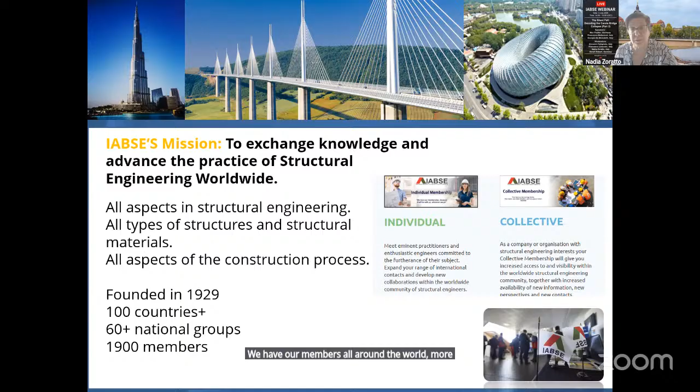If you are not yet a member of IABSE, you can become part of this great organization as an individual or collective member. We have members all around the world, in more than 100 countries, and for this reason we have several national groups that are very active in organizing webinars and conferences. In Italy, we have also a national group, IABSE IT. It was refounded recently in 2022, and we are trying to promote several activities related to technical task groups, dissemination activities, and training activities.

Upcoming conferences: we will have the next IABSE Congress in Incheon, Korea. I'd remind you that the early bird registration has been extended up to the 19th of July. Looking at next year, we will have the IABSE Spring Symposium in Guwahati. And then we are proud to announce that the next IABSE Congress will be held in Italy, hosted by Politecnico di Milano. The call for abstracts is already open, and the deadline is mid-September. So I invite you to send your abstract, as we have a lot of general and special sessions, so I'm sure you can find a proper topic for your abstract.

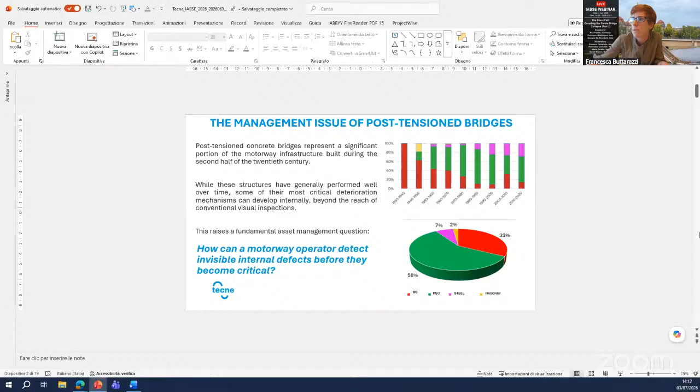This raises a fundamental asset management question: how can a motorway operator detect invisible internal defects before they become critical? And if you see the distribution of our bridges... can you see the charts? No, you don't see the charts. Wait a minute, I will... sorry... perhaps now, okay, yes, okay let's do like that. So the question was, how can a motorway operator detect invisible internal defects before they become critical? And if you see the distribution of our bridges, you can understand this is a very critical question for us, and we have to respond in an organized way.

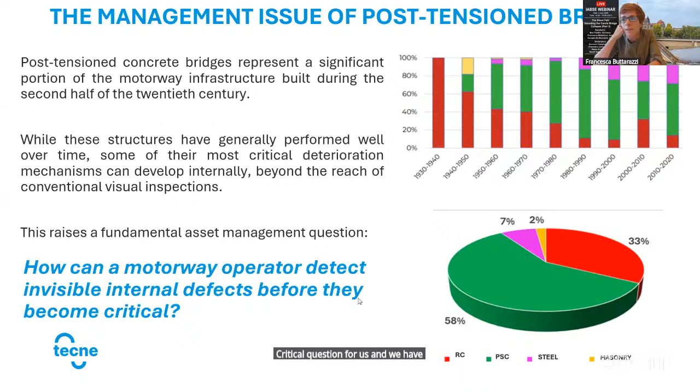To understand the problem it's also important to understand its scale. Here are some numbers about the Autostrade per l'Italia network: we have more than 2,000 bridges with a length over 10 meters, and 1,840 overpasses. The size and diversity of the network mean that special inspections cannot be planned as isolated actions. So we have to answer many questions: which structures first, which girder, which cable, which samples, which techniques.

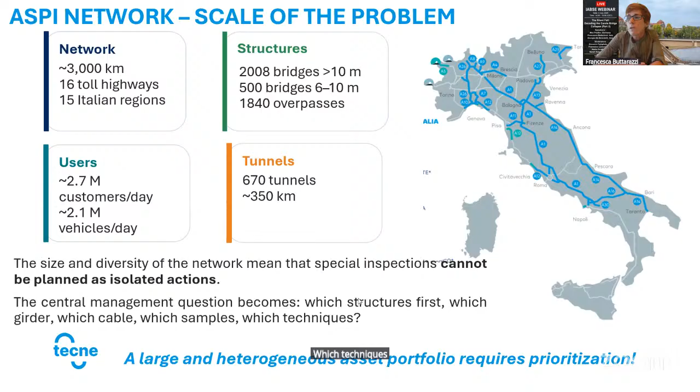This is why the answer has been an organized process that, starting from visual inspection, transforms the data collected during visual inspections into engineering decisions and a management strategy. To do this, we follow a chain of actions: prioritization, definition of sampling, diagnostics, and then we can define the proper strategy to manage the structure.

As you see, all this step is in some way defined by some guidelines. We are working on that, even with the regulatory, with our Ministry of Transports, as well as some consortium of universities. You see here the Fabre Protocol, but first of all, the bridges guidelines that were issued by the ministry.

In order to adopt a multi-level, multi-risk framework for bridge asset management. But then the single manager also needs to do some internal documents, such as one for prioritization, or also for technical regulations, in order to provide technical operational guidance on the various phases. It's not always the same laboratory on the field, it's not the same engineer that does the inspection, so it's important that activities follow the same regulations, in order to have results that are comparable.

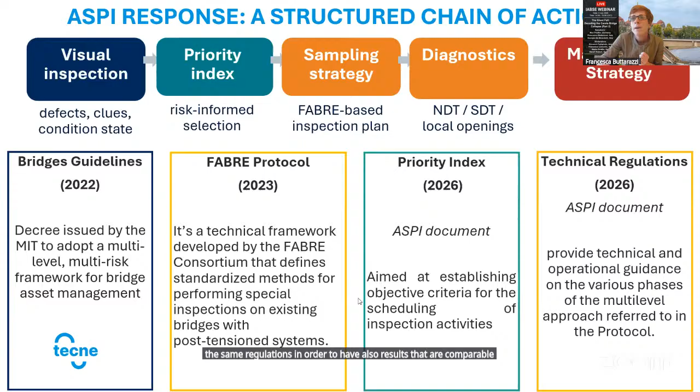The general framework - I want to give you a brief note on the Italian bridge framework, the Italian bridge guidelines that introduced this general framework to manage existing bridges. This flowchart has been translated - of course it's in Italian, but you have the reference of an article in which you can find all the description of this flowchart. You see that the objective of this flowchart is to have an organized sequence of activities.

The objective is to define the interventions, the bridges in which you have to do interventions, but at the same time, with all these activities that start from the census to the inspection and then to the classification of risk and the preliminary and accurate assessment, the objective is to reduce the risk of the network, as well as giving priority to the managers to assess all the bridges of their portfolio.

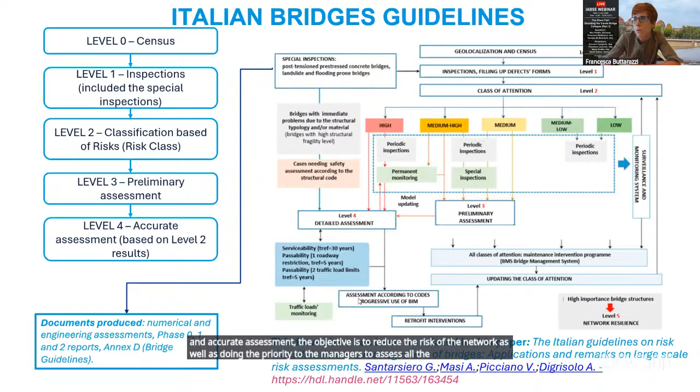So now we will go through the process I have shown you before, starting from visual inspections, which are in any case the first step you have to do, because we have to look for warning signs. And these warning signs can be visible defects as well as warning defects.

In Italy, there is even the bridge guidelines or the FABRE document that have introduced this differentiation between defects that are evident - you see cracks, you see the reduction of pre-stressing reinforcement, you know that there is something that is not going well on that structure.

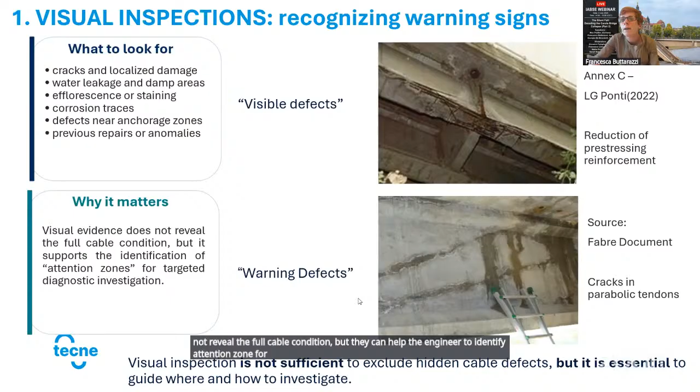But there are also warning defects. These are defects that do not reveal the full cable condition, but they can help the engineer identify attention zones for the following investigation.

After we have done the inspection, we have all the data to do the prioritization. Of course, we also use the data collected in the level 0 phase, so in the census. Here we have defined, in accordance with the Federal Highway Guidelines, a priority index that is a combination of the probability indicator of damage and the collapse consequence indicator.

So as well as for risk analysis, we have something connected with exposure and something connected with vulnerability. Here we have used the weights that are defined in the Federal Highway Guidelines. In some cases, we have done some adjustment for the Italian situation and also for the ASPI management needs.

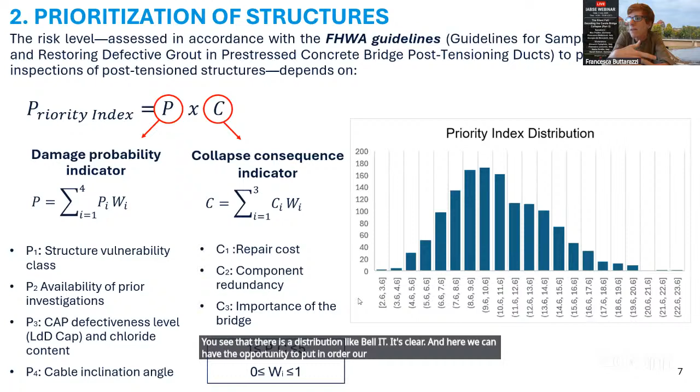And as you can see in the distribution, the indicator runs from 1 to 25, but you see that there is a distribution like a bell. I think it's clear - here we have the opportunity to put our structures in order and to decide which ones we address first.

After the selection of the bridges, we have another question: what do we have to investigate? Here we are following a statistical-based approach, first introduced by the Federal Highway document, as I have already mentioned.

In this case, we have to make some assumptions, because we have to define the acceptable percentage of cables with defects. This is something we assess at the beginning, and then we can decide after the first phase of inspections if we have to change our hypothesis. In any case, we start generally with 20% acceptable cables with defects, and then we define the total number of cables as a function of the number of beams and the cable number.

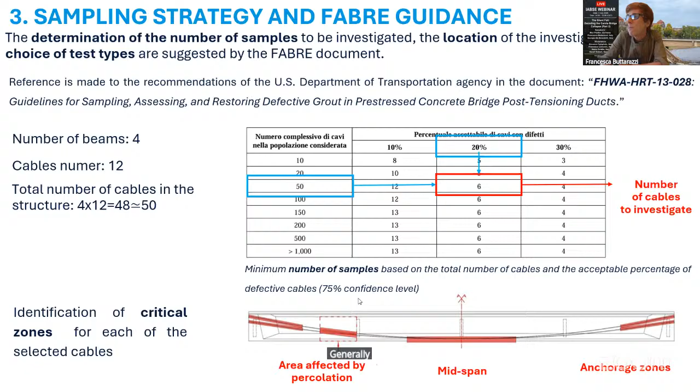And for every cable, you see also the critical zones in which we have to do the inspection - the mid-span, the area affected by percolation, but also the anchorage zones, which are generally the ones more affected by defects.

What we do now, after we have chosen the structure and decided the sampling and where to do the inspections, is follow an organized sequence of actions. The first is localization with georadar and geometric reconstruction of the PT system, in order to localize ducts and cables layout before intrusive actions.

Then we have the phase of defect screening. I'll show you some results later. We do this with ultrasonic tomography, which is useful because we can identify potential voids or anomalous zones without destroying the beam.

Then we have the confirmation phase. In some cases, generally every time, we do endoscopy, local openings, and micro demolitions, in order to go deeper into the defects and also to measure the corrosion, the lack of grout, and the grout condition.

So our idea here is that no single technique solves the problem. Reliability comes from sequencing techniques and interpreting the results together. It's important to follow this sequence of actions in order to have the possibility to give the right answer.

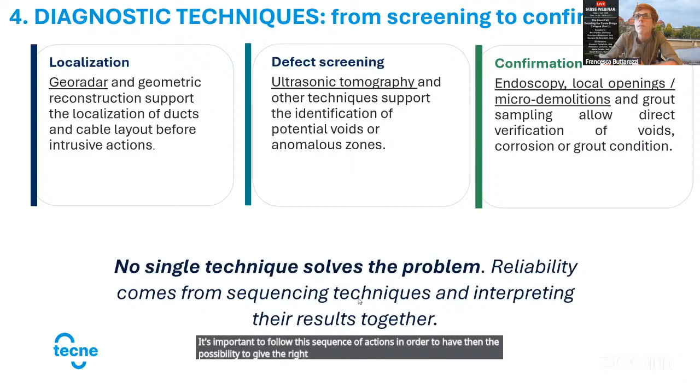Now I want to briefly touch on the different techniques. I know these are well-known, but I think it's interesting to show our results from our in-field activities. For example, the GPR technology is used to determine construction details.

It's very important to set the frequency according to the depth of the object of investigation. Sometimes it's also important to do destructive tests to supplement the data acquisition. And georadar is important because sometimes we don't have correspondence between the as-built drawings of the bridge and what we find in the field.

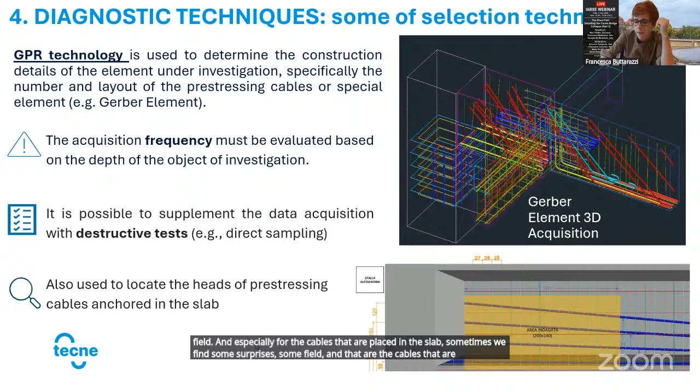Especially for cables placed in the slab, sometimes we find surprises in the field, and those cables are frequently affected by defects. Tomography testing is also, as I said, a technique we always use in order to identify potentially anomalous zones.

These results can be interpreted in relative terms, and attention areas must be subjected to direct testing. Our experience is that generally in 50% of the anomalous zones, we then find also a defect. So there are some false positives that have to be checked with direct inspection.

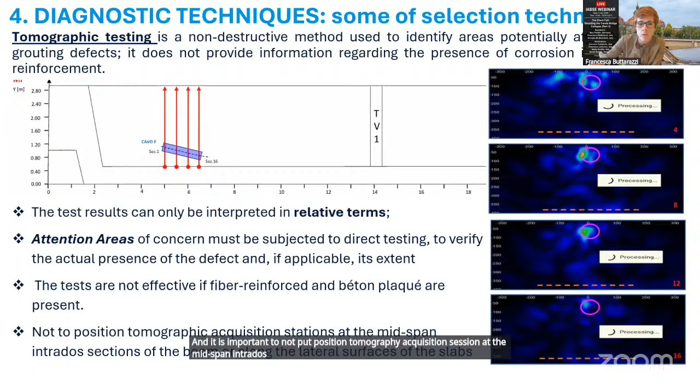Just to mention, the tests are not effective if fiber reinforced concrete and beton plaqué are present. And it's important not to position tomography acquisition stations at the midspan intrados of the beam or along the lateral surfaces of the slabs.

This is the technique I like the most, because here you can see and you can measure, but in this case we also have a different approach. We start with endoscopy inspection, a very local inspection that must be performed carefully to avoid damaging the cable. Then if we find defects, we go with local opening, wide enough to expose at least a semi-diameter of the cable.

There you also have the possibility to measure, for example as you can see in this picture, the reduction of the diameter. In this case you have all the information you need for the following evaluation of the structure.

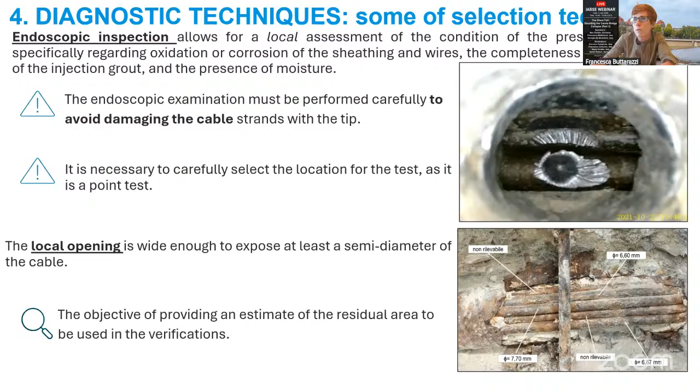In some cases we have also experimented with digital X-ray radiography, used to obtain high-resolution images of post-tension cables. In these years, low-power instruments have been developed that are compliant with the provisions of the legislative decree.

As you can see here, it's very interesting because with this digital X-ray you can really see the cable, the absence of grout, and in case of defects you see the defects. For example, in this case, grouting defects you can see here.

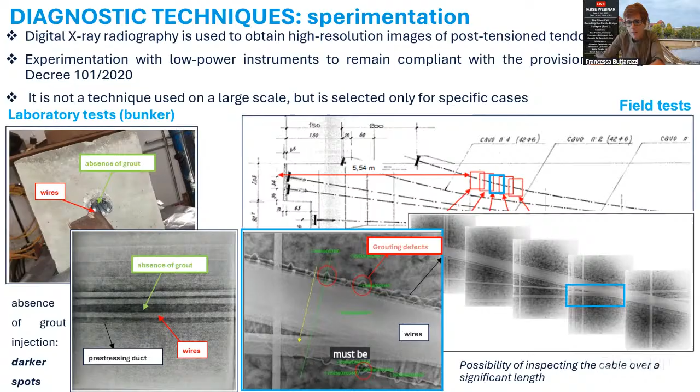These are some pictures that show the potential of this technique. What I want to say is this technique cannot be used on a large scale, but must be selected for specific cases. And with this, we move on to another topic.

Sometimes it's not sufficient to do local testing, but we have to do a global understanding of the structure. In this case, we use load testing or dynamic testing. We are aware of the difficulties of using this testing to identify defects or crack patterns, because they are not tests designed for that. But for sure, they can be used to assess the global stiffness and integrity of the structure.

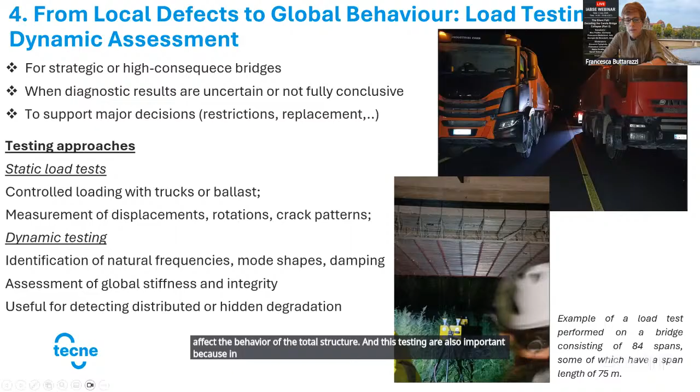And these testing are also important because in some situations we have to follow up after the single inspection. We also have the possibility to install some monitoring in order to follow the structure over time, especially if we have deformation to monitor, crack displacement, something connected with environmental parameters. And for example, also the acoustic emission strategy or techniques, which is the topic of the next presentation, can be installed and used for monitoring activity on the structure.

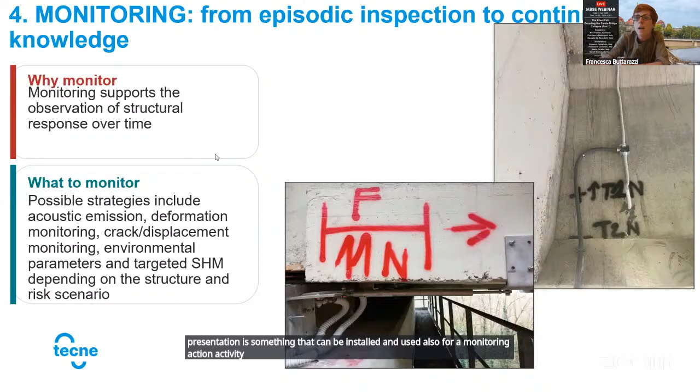Before wrapping up and going to the conclusion, I want to show you a case study of the ASPI network. This is a very long bridge, more than 1 kilometer long, representing 0.4% of the structures of the ASPI network. So it's a particular structure, and here we have a lot of beams and also many cables, of course.

We have followed the whole process to investigate this bridge, starting from a historic analysis of all the data collected in the past. It's important to say it's not only this year we are doing these techniques, but now we have an organized approach that wasn't available before the issue of the bridge guidelines in Italy. We started with visual inspection, detecting 86 warning defects and 3 visible defects. Then we moved to the strategy of sampling, defining the critical spans and cables to be selected and investigated, and then the diagnostics.

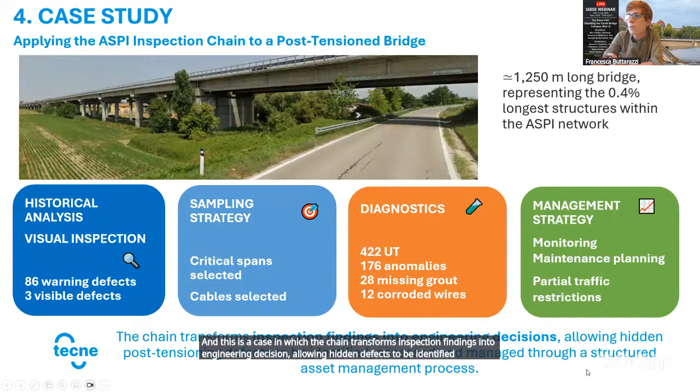And so now we are at the strategy moment, defining our monitoring and maintenance planning. Of course, we have also made some partial traffic restrictions, because we performed the assessment with level 4 evaluation of the structure, defining its reliability. This is a case in which the chain transforms inspection findings into engineering decisions, allowing hidden defects to be identified, assessed, and managed through a structured asset management process.

Before going to the conclusion, I want to highlight the importance of archiving all the data we are collecting. We have an Annex D, required by the bridge guidelines, which is a report we have to produce with all the data we collect. But ASPI, Autostrade per l'Italia, is also working on a digital archive in the Argo platform, in order to connect all the information to the beam elements of the structure. So you can check before going on site if investigations have already been done, and if you need to do some assessment, you have all the data collected.

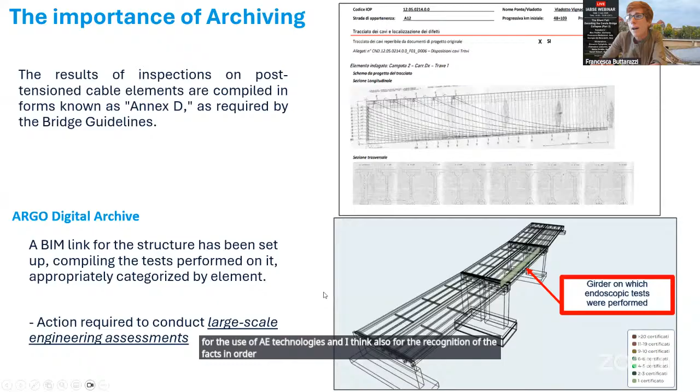This is work that has great potential, even for the use of AE technologies, and I think also for the recognition of defects, in order to optimize our activity on site.

So let me conclude with a few messages. As I said at the beginning, hidden cable defects are a major management challenge for aging pre-stressed concrete bridges. Visual inspections are necessary but not sufficient; they must be integrated with targeted diagnostic campaigns. Prioritization transforms a large asset portfolio into a rational inspection program. The FABRE-based progressive approach supports the selection of samples, the location of investigation, and the choice of test types. As we have seen, no single technique is sufficient. Effective diagnosis requires a sequence of complementary methods, and interpretation is as important as measurement.

Monitoring and formal reporting turn observations into decisions and allow continuous improvement of the system. Knowledge must be structured and traceable. Inspection and testing data must be systematically collected and stored. So to answer the question we posed in the first slide: invisible defects become detectable when inspection, diagnostics, monitoring, and engineering expertise work together within a structured asset management framework.

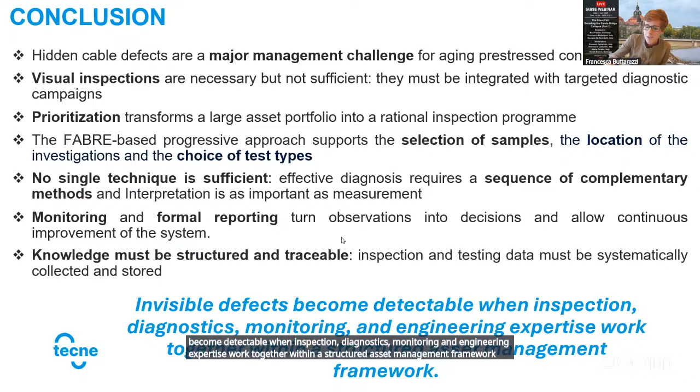Thanks for the attention, and sorry for some disturbance during the presentation.

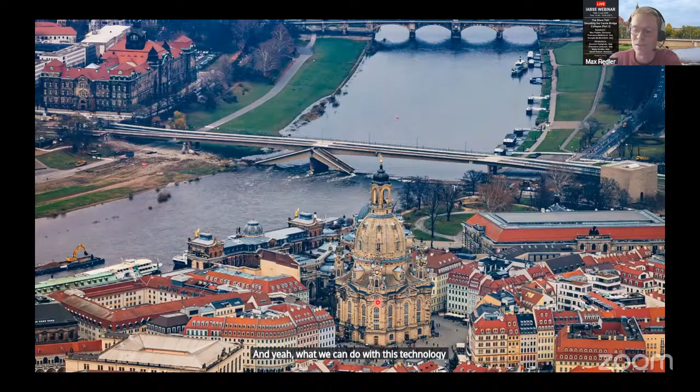What we can do with this technology is listen into the structure and detect the damage occurring within the tendons, within the pre-stressing wires that are suffering from stress corrosion cracking. Stress corrosion cracking mostly starts evolving during the construction phase, and during the service lifetime it's more of a fatigue issue, so these wire breaks can occur over the lifetime of the bridge.

Whenever we have to assume that the damage occurring inside the structure is not propagating in the form of cracks to the surface, we are not really able to detect this damage unless we apply acoustic emission and listen to the structure. Then we are able to identify critical areas and assess these structures with this technology.

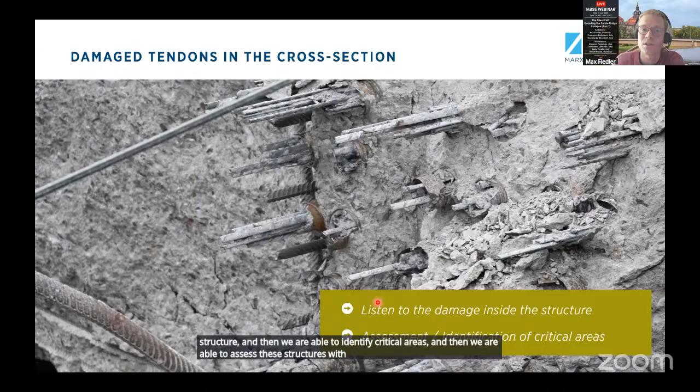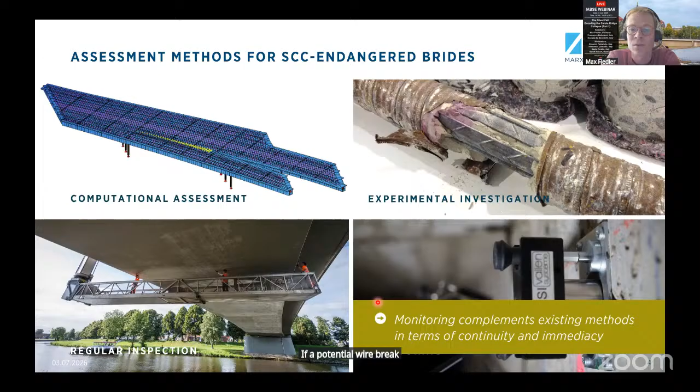Because what we are able to do with acoustic emission is that when we listen to the structure, we get an almost real-time message, an alarm, if a potential wire break occurred, and we are then able to react to this alarm. So what's behind acoustic emission, what does it mean?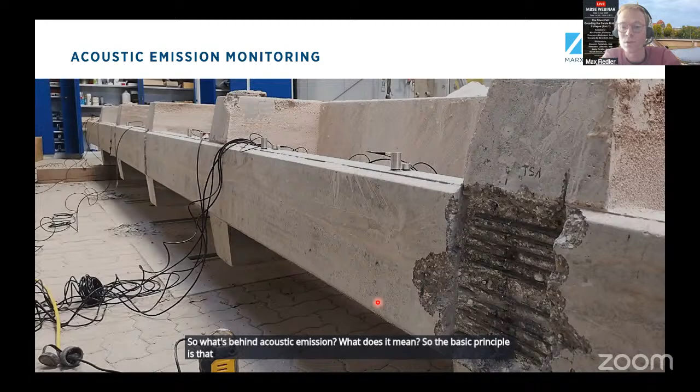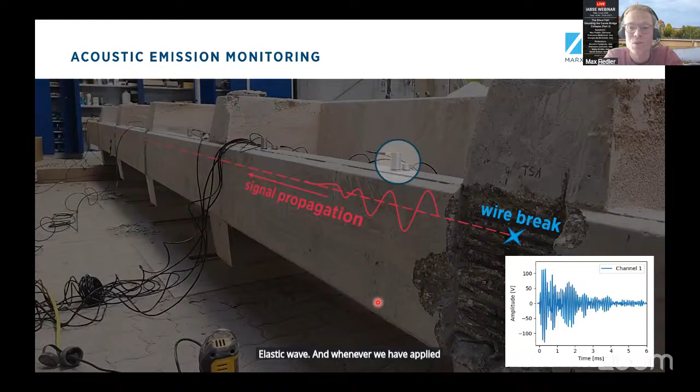The basic principle is that elastically stored energy within a pre-stressing wire is released when the wire breaks, and this energy can propagate within the structure as an elastic wave. Wherever we have applied a sensor to the surface, whenever this wavefront arrives, we are able to detect it and measure the energy within it.

When we talk about acoustic emission, we always have to take into account the propagation path the signal has already traveled. With longer propagation paths, the signal suffers from attenuation and scattering. This is something we have to consider when analyzing signals from acoustic emission sensors, but also the other way around: when designing a sensor layout, we have to take into account this attenuation and the possible intensity of the source signal, which in this case is the wire break.

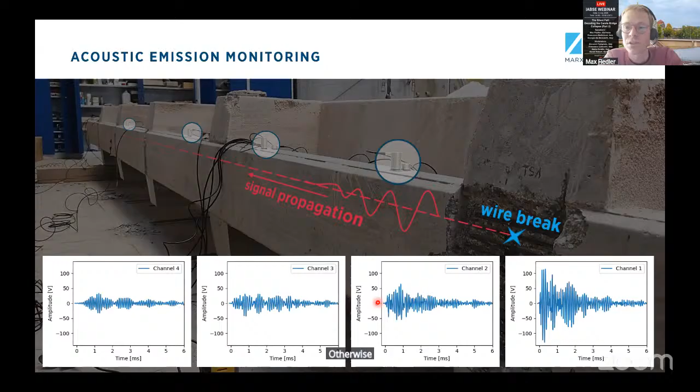This is something we always have to be aware of when applying such monitoring systems. Sensor distances cannot be exorbitantly long; they have to be within a specific dimension, otherwise we are not able to potentially detect all wire breaks.

This is a very complex method, and it comes with a lot of things you can do wrong. In Germany, we released a guideline together with Stephan Pirskawetz from the BAM, the Federal Institute for Materials Research and Testing, together with the German Society of Non-Destructive Testing. Within this guideline, the fundamentals, possibilities, and limitations of this methodology are explained and regulated, and the requirements for measurement technology are described.

There are examples on sensor arrangement on the structure, and the structure content is described, and also the qualification for bidders in terms of a tender project are explained. This may be interesting for the international community, as this guideline is currently in translation, I think it's in the last review right now. So whenever you're interested, it should be released internationally within maybe the next half year or so.

So there you have a good basis for applying this methodology. The application of acoustic emission sensors from a measurement perspective is one thing - choosing the right sensor, choosing the right data acquisition properties, and being able to detect these signals. But what's actually more interesting is what you do when you measure wire breaks or potential wire breaks, and assess them as confirmed wire breaks.

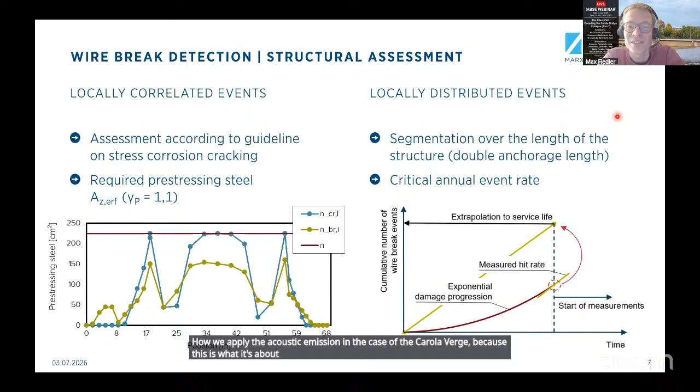If I go into detail with this, we could talk for more than half an hour, but I just wanted to inform you about that. What I want to do now is spend the rest of the talk on three examples. First, I want to show you how we applied acoustic emission in the case of the Carolabrücke, because that's what this is about. Then I also want to show you some examples from other bridges we worked on in the last year, which are very interesting, I guess.

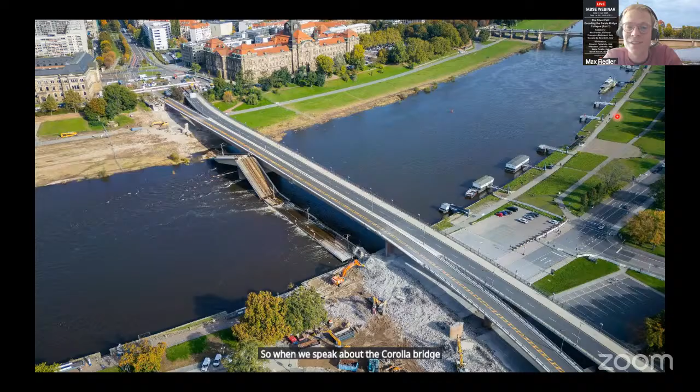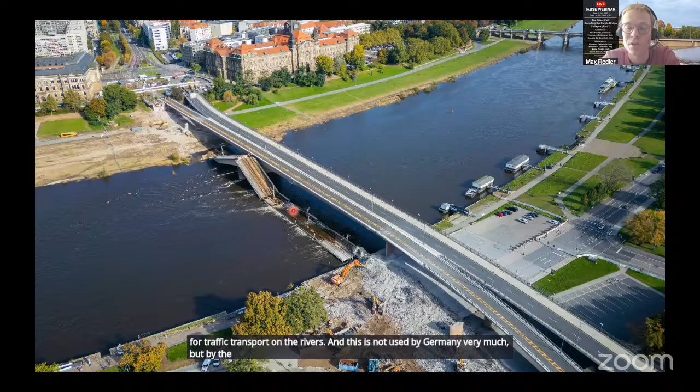When we speak about the Carolabrücke, you remember that at some point the demolition of superstructure C, which was the one that collapsed, was progressing, and at some point the River Elbe was about to be set free again. The River Elbe is a federal waterway for traffic transport on the rivers, and this isn't used by Germany very much, but by the Czech Republic.

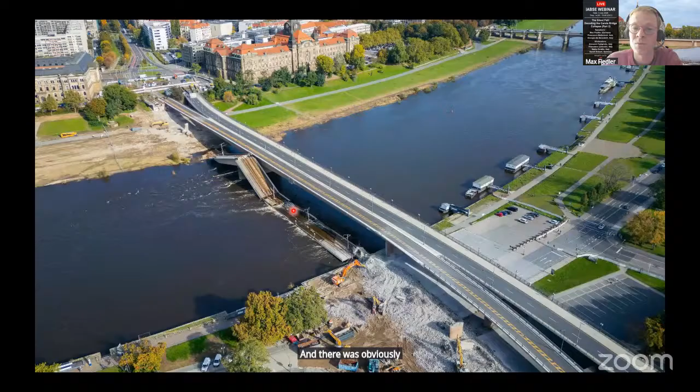The Czech Republic had a very high interest in transportation of high load freights on the River Elbe. So the remaining superstructures needed to be assessed in terms of their remaining load bearing capacity. As we found damages and endangered wire breaks there, the question was obviously whether these superstructures still have enough load bearing capacity. This is when the city of Dresden decided to monitor these sections, the red section of the superstructure, with acoustic emission monitoring. This decision was made somewhere around mid-December '24.

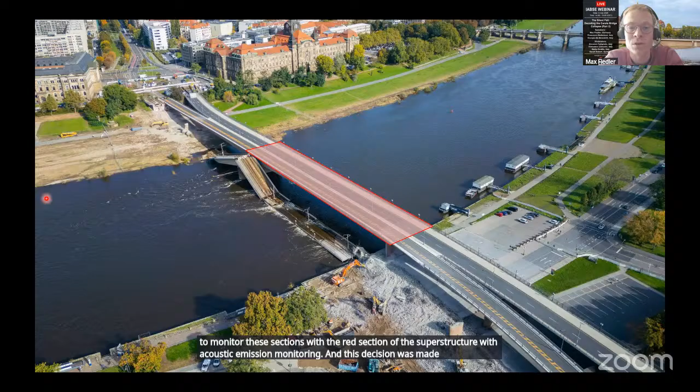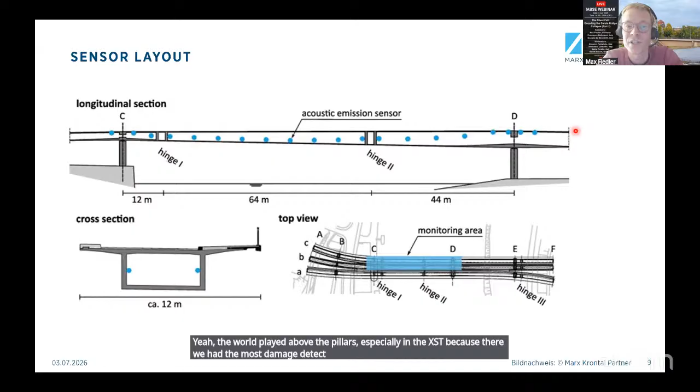Here you can see the sensor layout. We only focused on the section between pillar C and pillar D, following the tendon line, and focusing specifically on the load plate above the pillars, especially in axis D, because there we had the most damage detected from the diagnostics.

This monitoring concept was implemented within about 4 weeks. By the 2nd or 3rd of February, the technique was installed. Then we decided to have a preliminary monitoring period, where we just wanted to observe what's happening within the bridge before we allowed any ship passages to happen. As always with such a period, you can see some signals over time here, and some acoustic emission feature, which is a peak amplitude on the y-axis.

Within this period, we had nearly no serious acoustic emission. Some came from diagnostic work, some came from electromagnetic coupling because of the electricity inside the bridge, since the switches went on and off. But nothing really severe and nothing really specific.

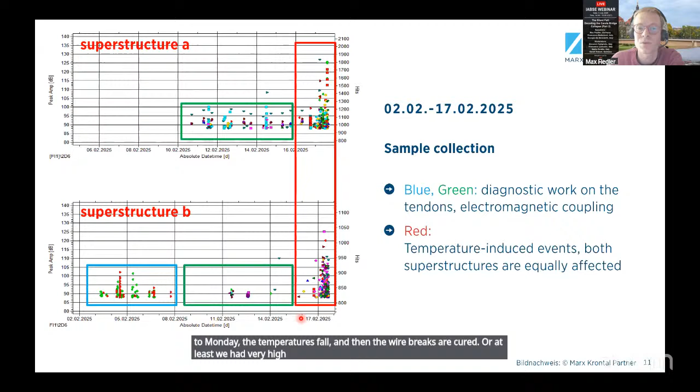Just from that day, on Monday the 17th of February, we wanted to start with the ship passages. And as it always has to be, from the night, from Sunday to Monday, the temperatures fall, and then the wire breaks occurred. Or at least we had very high intensive, very specific characteristic signals detected. These signals were also localized directly within the plate, directly above pillar D, localized there in the superstructure.

So what we did before, when we installed the monitoring system, was try to guess how many wire breaks we could allow during this monitoring period, and for the remaining service lifetime. We put a traffic load into our model, and assumed that the bridge, before the collapse of superstructure C, the other superstructures were able to bear a load of 2 kilonewton per meter, so very light traffic load. We translated this traffic load into allowable wire breaks, which in the case of pillar D were 14 wire breaks.

So in one night from Sunday to Monday, we detected several wire breaks within this plate, and our allowable wire breaks reduced by about a third. There was a lot of trouble within the administration, as you can imagine, and we were thinking, how can we progress with it? Because with every night we proceed, the allowable number of wire breaks could reduce by a significant step. So we needed just more time, so to say.

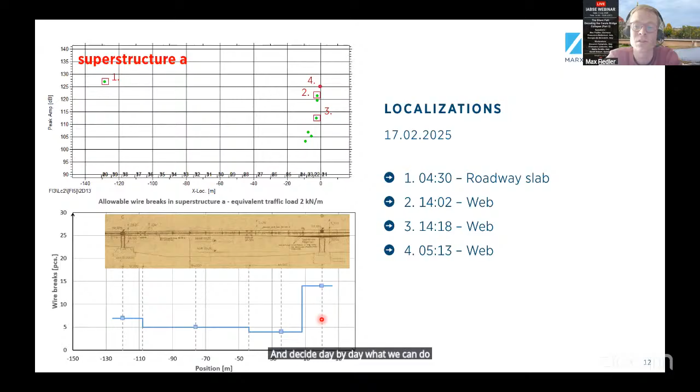This is how we then continued, day by day. We very closely observed the signals coming in and decided day by day what we could do. After a further period of observation, two weeks later, we finally allowed some ship passages, and every time we had no further signals or events detected related to wire breaks, we got more sure that this was a good way. This was very intense for the people within the project, because every day you had to decide whether a ship passage could happen or not.

Another example I want to show you is the Waren-Herrensee Bridge. Waren is a city in North Germany. This bridge is a roadway bridge passing over a railway line, which is a very important railway line towards northern Germany, and also some other federal roads.

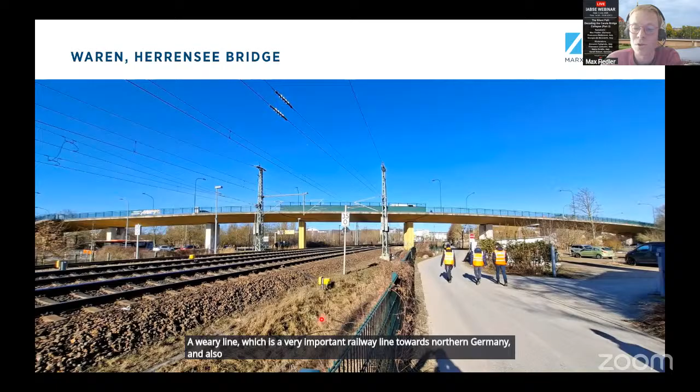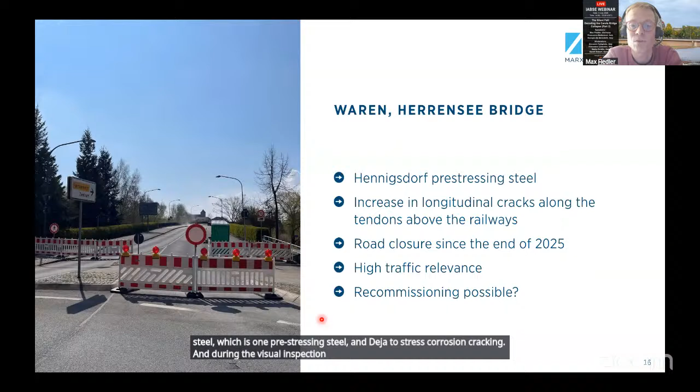This bridge was constructed with the so-called Hennigsdorfer pre-stressing steel, which is one pre-stressing steel endangered by stress corrosion cracking. During the visual inspection of the superstructure over the railway, longitudinal cracks were observed, and this led to the closure of the bridge by the end of 2025. Since this bridge is of high traffic relevance for the city, because otherwise the detours are very long, there was a question of what we could do to maybe recommission this bridge again.

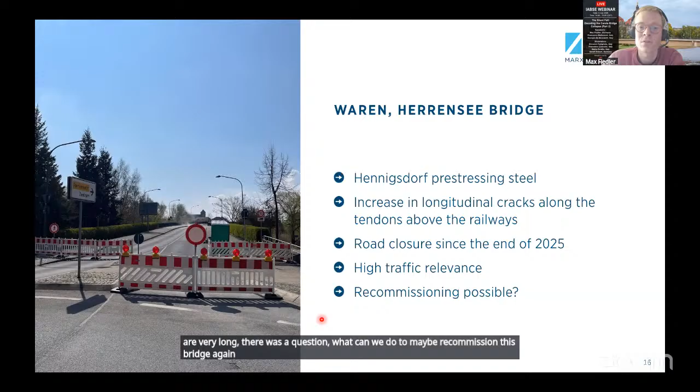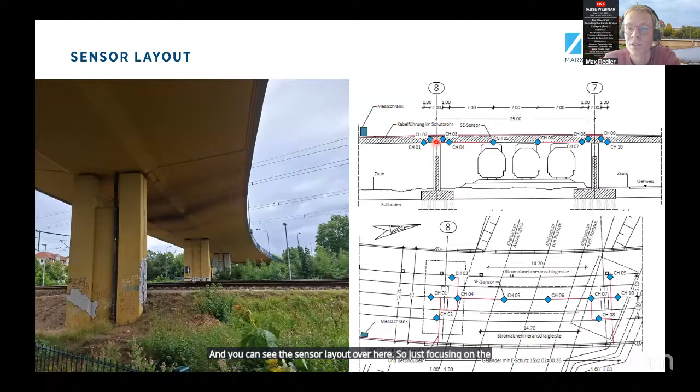First of all, to assess this damage detected on the underside of the superstructure, an acoustic emission monitoring system was installed on a very short basis, and other diagnostic measures were undertaken in this railroad field. You can see the sensor layout here, focusing on the two neighboring pillars and the railway field. The installation was done overnight, within one night, and the diagnostics were also done within the same night. There was a lot of different traffic under the bridge, a lot of people around, to gather as much information in as short a time as possible.

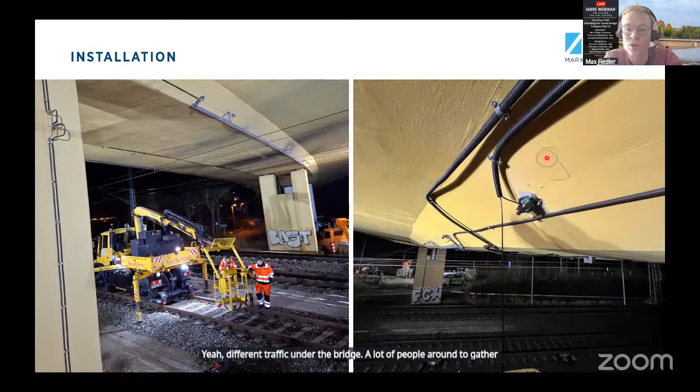This monitoring system was then in operation for almost 3 months, and nothing really happened. So we were pretty sure that we could continue with this bridge on a very good basis.

We developed a diagnostic program where we wanted to do tendon sampling, material sampling on the tendons from the upside of the bridge, in the pillar areas. What we found there was a typical formation of these cracks, stress corrosion cracking indications. Also, when we opened the tendons, we already found the first wire break because of stress redistribution, direct sun on the wires, a different stress situation, causing the wire to break spontaneously.

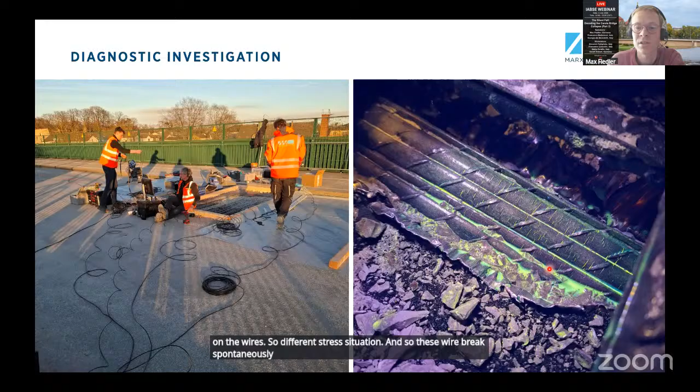And we then closed the tendons, and since we had this monitoring system already installed, we were able to track the progress of damage very specifically in this case. On the 6th of March, a Friday unfortunately, the tendons were already covered with concrete.

Even more wire breaks occurred spontaneously, and we were able to measure all individual wire breaks. As you can imagine, when you have such a situation on a Friday and it's not stopping, you get nervous, because at some point this could lead to a collapse of the part, meaning the bridge falling onto the railway tracks.

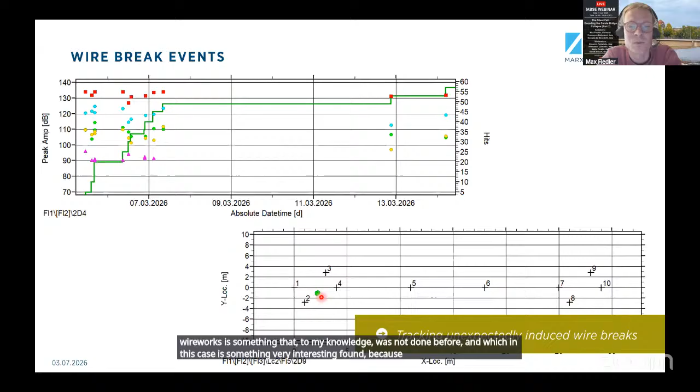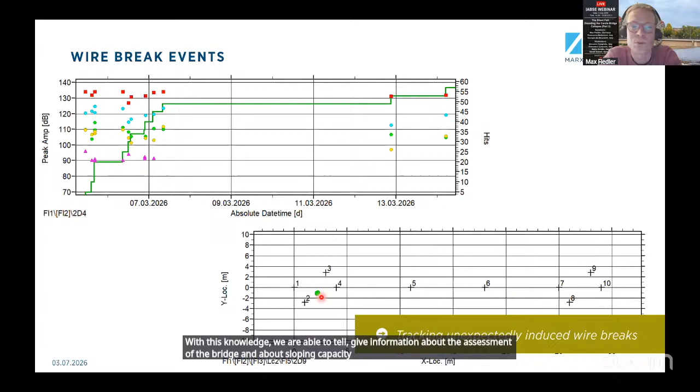What was a bit of luck is that we had a very narrow network around the pillar, and we could localize these wire breaks with high precision specifically where we had opened the tendons, meaning our manual work on the wire was most likely the impulse for the breaks to occur. This tracking of unexpectedly induced wire breaks, to my knowledge, was not done before, and it's very interesting because with this knowledge we can give information about the assessment of the bridge and its remaining load bearing capacity. Even though we have damage in this system, we know how much, and since nothing else happened elsewhere on the bridge, we know there can possibly be a future for this bridge.

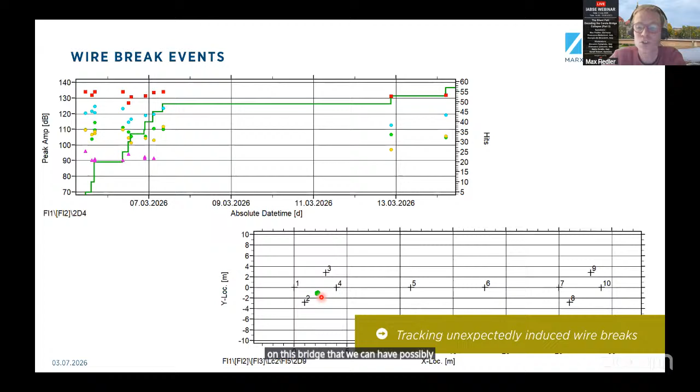Another example is another bridge in Dresden, the Budapest Street Bridge, which was given to us shortly after the Carolabrücke, because the city of Dresden was very nervous about their bridges at that time. Since the designer of the Carolabrücke was the same as the designer of the Budapest Bridge, and the Budapest Bridge was a bit younger than the Carolabrücke, everybody was pretty nervous about it.

From the top view here you can see we are passing a lot of railway lines close to the main station Dresden, located over here, and also a very important street in Dresden, the so-called Ammonstraße. So we installed a complete acoustic emission system on this bridge, also another fiber optic system, and the plan was to do diagnostic investigations just to get a complete assessment, or the foundation for one.

From the beginning of the monitoring, we had some really suspicious signals. For a period we just observed the signals and the bridge behavior over a certain period of time. What took our attention was that everything concentrated on one axis, axis C.

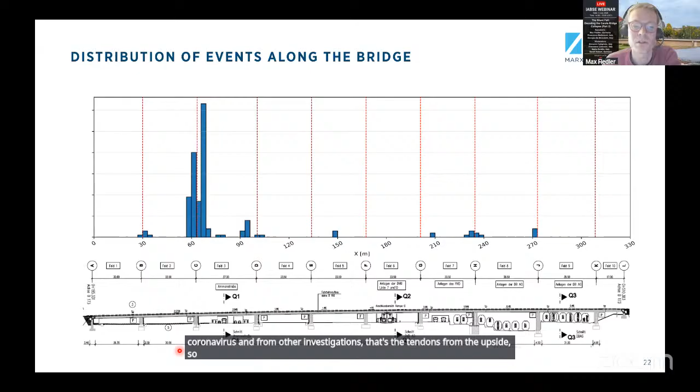As you can see, the bridge in its longitudinal section, the railway roads, and the Ammonstraße as I said before, so axis C became a highlight for us. Since we were planning the diagnostic measures, we specifically planned to go into this axis C, and since we knew from the Carolabrücke and other investigations that the tendons from the top of the pillar are the most endangered, we also went in there from the top side.

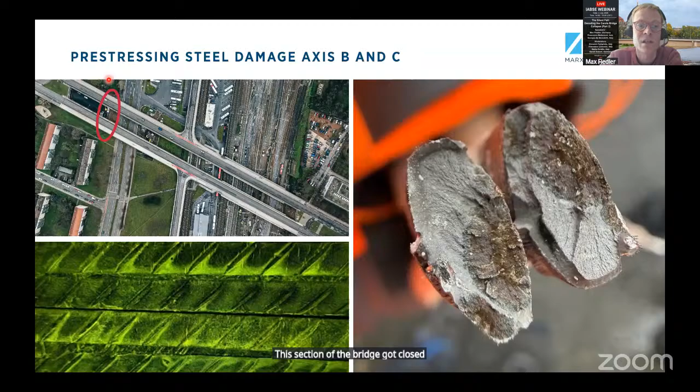What we guessed from the acoustic emission was that we found the right spot with the diagnostic investigation, because these tendons had severe damage. What happened after is pretty clear, because we had a significant number of potential wire breaks there. This section of the bridge got closed, and we could then design a very specific supporting system for this bridge.

Closing the Ammonstraße entirely was not really an option, so there needed to be some emergency supporting of the Budapest Street Bridge, and this was designed in a very specific manner.

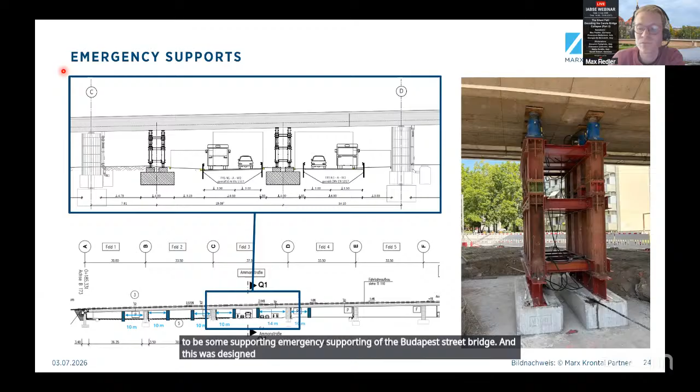So to conclude, I hope I could show you that the application of acoustic emission delivers a lot of potential for a very specific assessment of critical structures, and also for identifying critical structures. These are three examples of critical structures, but at MKP we monitor 25 bridges now, and these are some of the few that are very critical. For the others, which have shown no critical events, we can say they can stay under traffic for further decades, so to say.

And what it also enables is implementation of very targeted measures, as seen in the last case. The standardization in this field made everything more transparent, especially for authorities. And this is something that is very helpful for everybody, I think.

It also needs to be highlighted that acoustic emission monitoring is only one component in the assessment strategy for stress corrosion cracking, because you always need a recalculation and an escalation concept in cases of damage events or critical cracks showing or whatever. Diagnostic is a very important tool, and also experimental load bearing assessment can be a part, meaning load testing, whenever you talk about recommissioning of bridges. So thank you for your attention.

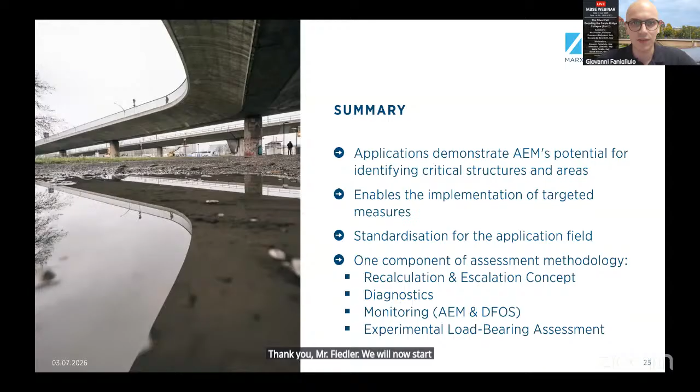Good morning. I try to answer because Francesca has a personal commitment. How many bridge assessments in the year? We are organized to do a program, and this year we check until 20 bridges, 20 structures. For the next year, probably the same number we try to check. This is the... okay.